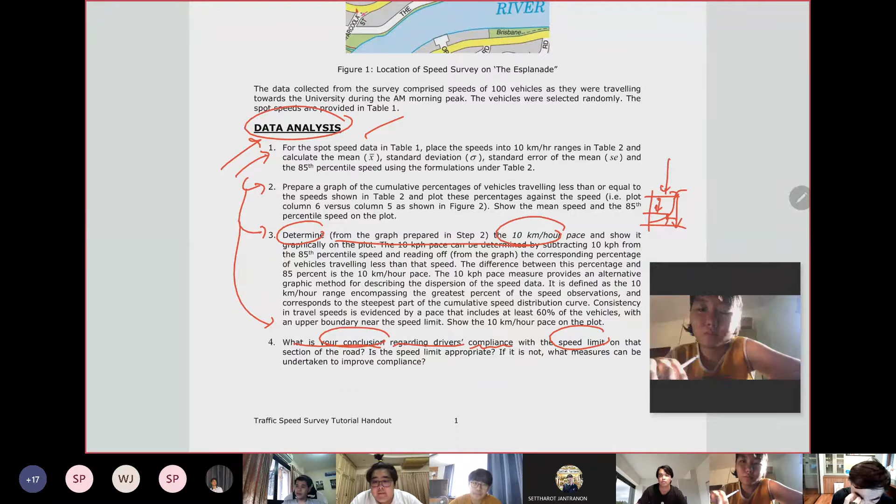Okay, this is all those questions. If you read this file, you're supposed to answer from this one. For those who are not making any conclusion here, please submit.

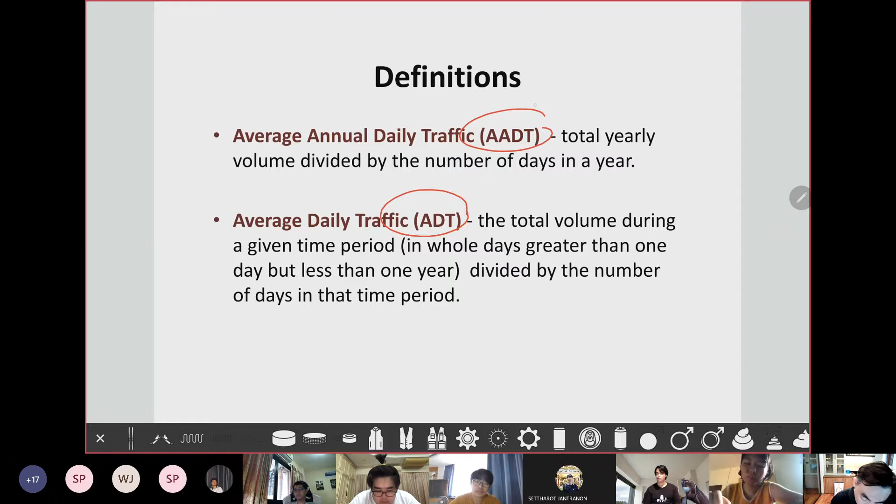These two parameters are very important: AADT and ADT. The unit is vehicle per day, including both directions. You learned what demand and capacity mean, and that one lane's capacity is supposed to be maximum 2,000 passenger cars per hour.

Okay, today we're going to learn what passenger car means, PC, rather than what we used to say, vehicles per hour. Now we're going to say passenger car per hour. What does passenger car mean? We'll talk about that later today.

Okay, this one is related to the location that does not represent the demand. If you go on the road and count the traffic volume, the volume you get may not represent the demand. These two situations could be representative of data that does not represent the demand. Okay, this is the explanation.

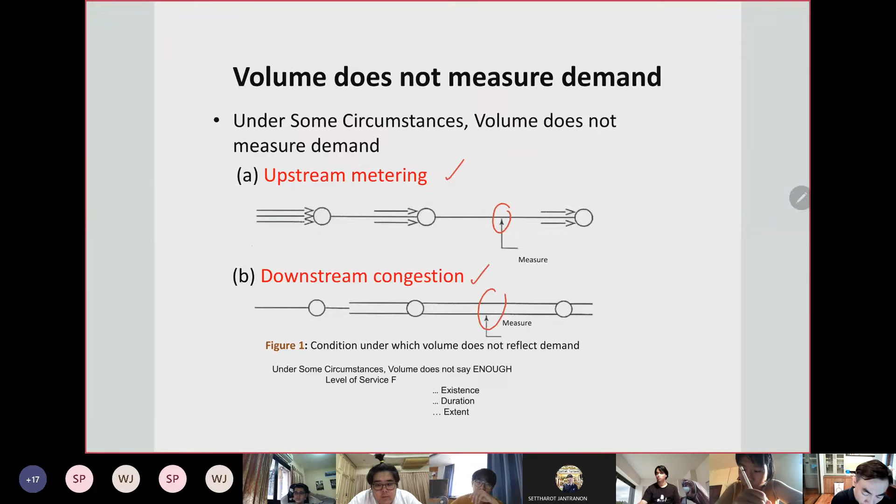For those where demand is over capacity, what can happen? Okay, it will generate queues. The length of the queue gets longer. Okay, and this is the capacity that the facility, road, toll plaza, or whatever can handle, a reasonable number.

Okay, we talked about this one already, and we also talked about how we use this kind of data. Okay, how can we use total annual volume? It's like 10 million vehicles per year. What do we use this number for?

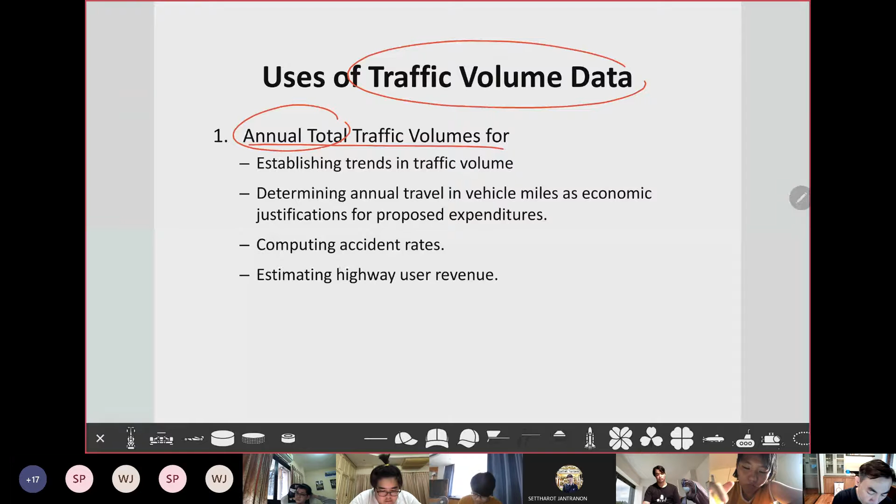Okay, this is the explanation of what we use ADT, vehicle per day, for. We're not going to use this one for designing intersections. We're not going to use this one to design the number of lanes. Okay, we use this volume to represent this kind of information.

Okay, and PHV, peak hour volume, this is the one we use for designing the intersection, traffic light, number of lanes, or something like this. We use this number to handle, we design the facility to handle this volume during the peak period. If we can handle it during the peak period, of course during off-peak it should be fine.

So in one day we have 24 hours, right? But which one are we going to use as representative for design? What is the peak period? What is the peak hour? Which hour of the day? Can anyone give me an example of which hour of the day we should use as representative for design purposes?

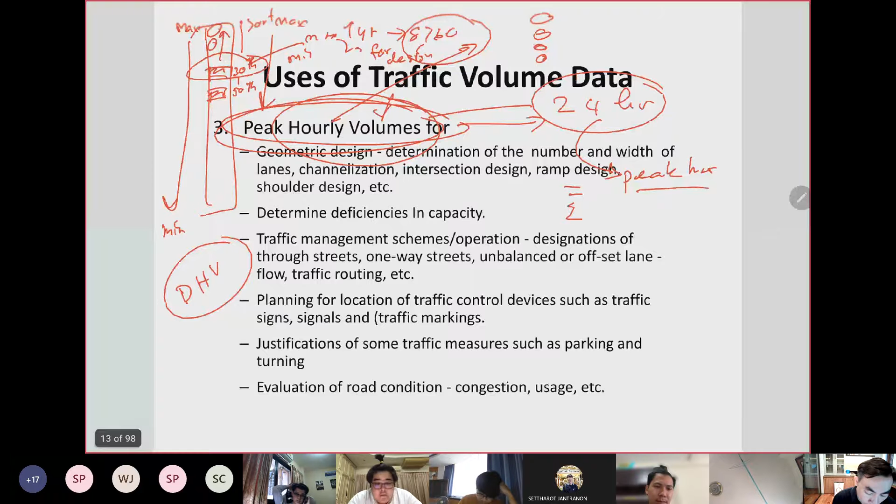We call it design hourly volume, DHV. We call it DHV, okay, design hourly volume. We'll talk about this one later, okay? But just keep in mind that normally we're gonna use this number. Today, we're gonna talk about design hourly volume as well.

We're talking about classifying traffic volume: short-term counts, and we do intersection counts, okay? Intersection count is different from mid-block count, okay? We have another one, mid-block count and intersection count. You should understand the difference between mid-block and intersection count, okay?

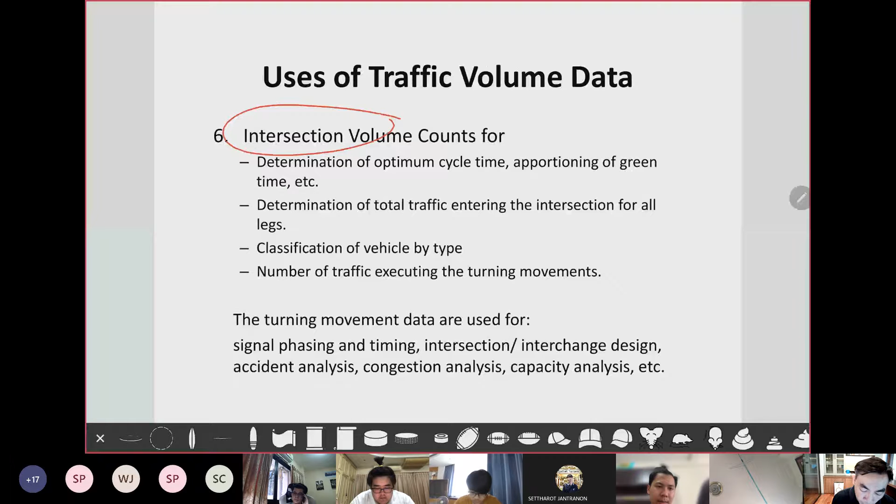Another one is cordon count. Cordon is counting something like a closed area, like Bangkok or Thammasat University. You want to keep a certain count at every entrance and exit. That is cordon count.

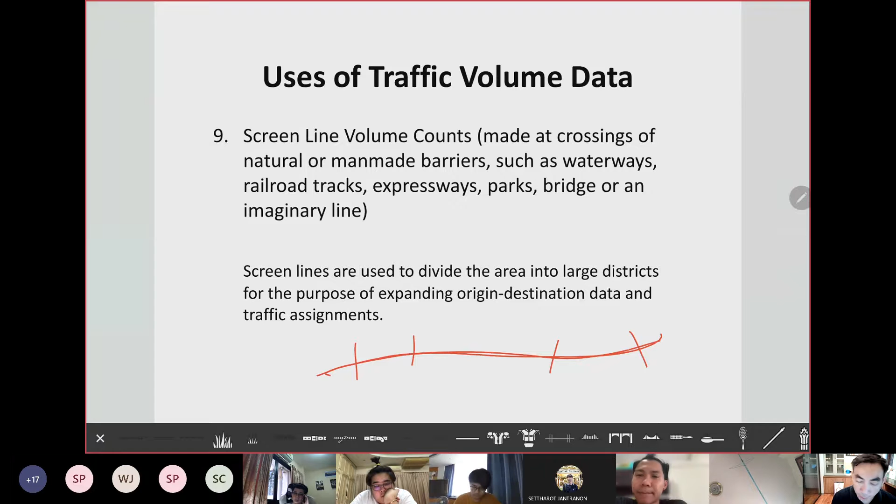And screen line - I gave you the example of the Chao Phraya River counting all the vehicles across the bridge. This river can be considered a screen line counting. It doesn't have to be a natural river or something like this - it can be man-made, like a railway, or even use an imaginary line.

I talked about manual counts. What is the good benefit, okay? What is the good advantage and disadvantage of the manual count?

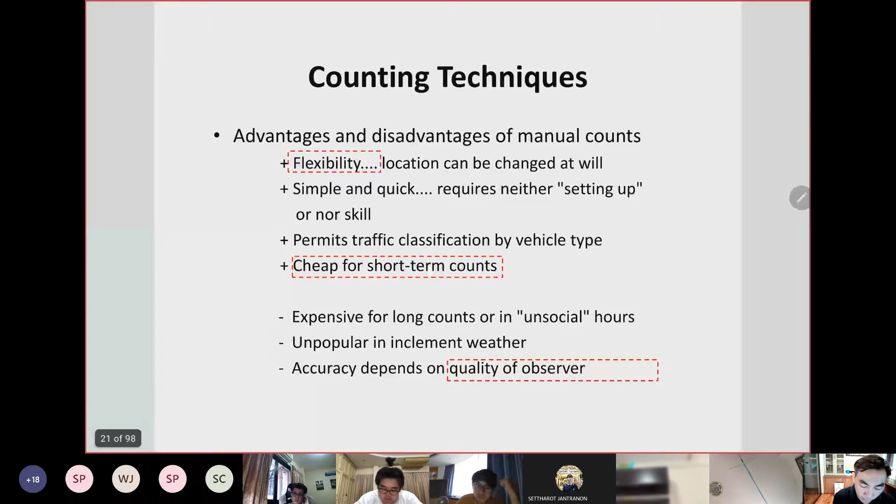And another one is mechanical counting. Okay, this mechanical counting has different technology, okay, other than the loop detector, which is some kind of the oldest one and gives very precise and very good data. The data from a loop detector is quite correct compared to other new technology, but it has pros and cons, okay. This detector technology is considered to be two groups.

The first one is intrusive, okay. The reason we call it intrusive is because it disturbs the pavement, okay - it needs to be cut, something like that, cut the pavement and put something inside to make a magnetic field. That's why we call it intrusive.

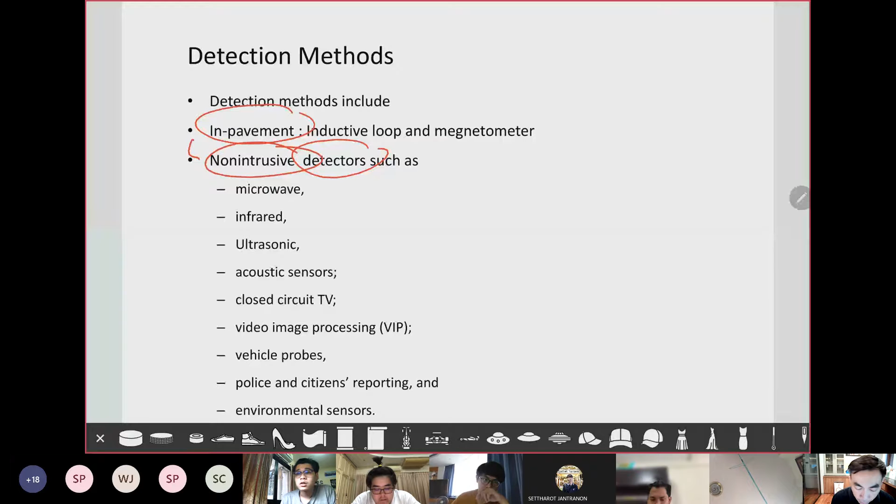Another version is non-intrusive. There are several non-intrusive types. Nowadays, state-of-the-art detectors, most of them are non-intrusive. This can be microwave, infrared, ultrasonics, acoustic, CCTV or something like this. On top is the very inductive loop - okay, just go and read this one.

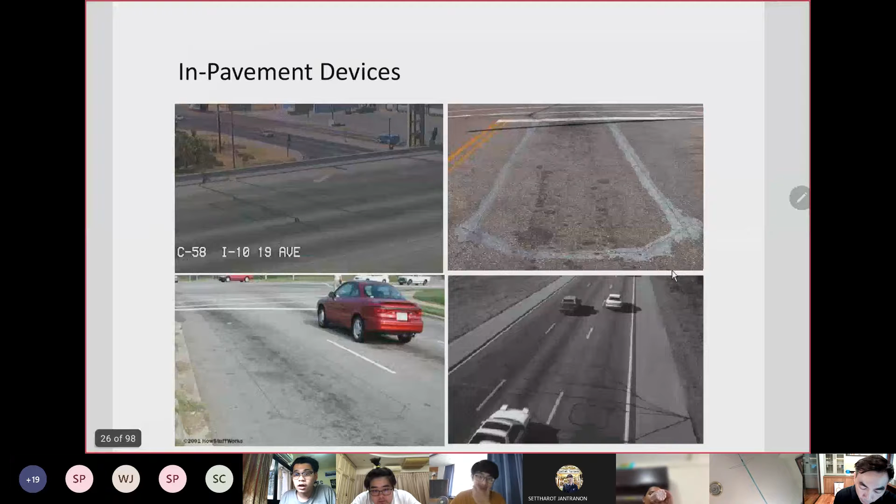This is an example of cutting the road. This is the old-fashioned style in Australia or in the US - they put a lot of traffic detectors along the highway or freeway. This is an example of them installing the traffic detector on the freeway, almost every 500 meters.

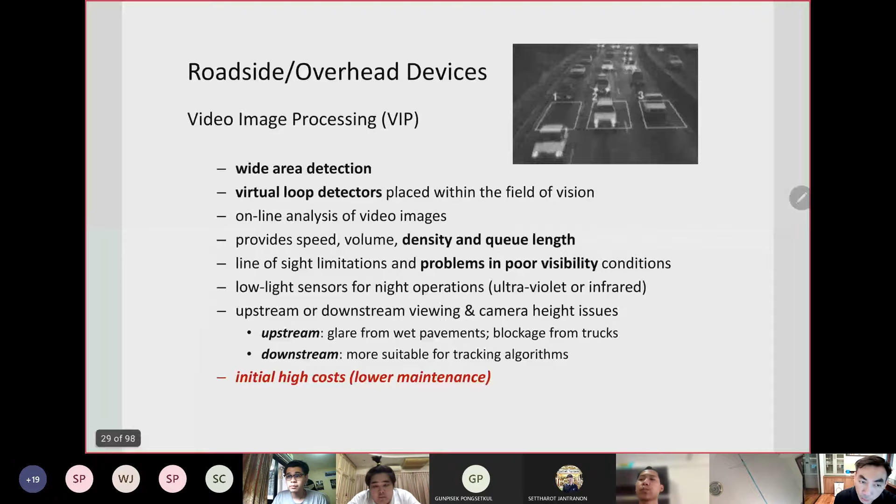And the next one is just to quickly cover what we learned last week, okay - this is video image processing. Okay, they have two different versions. That's why we call it image processing, because they're checking the pixels.

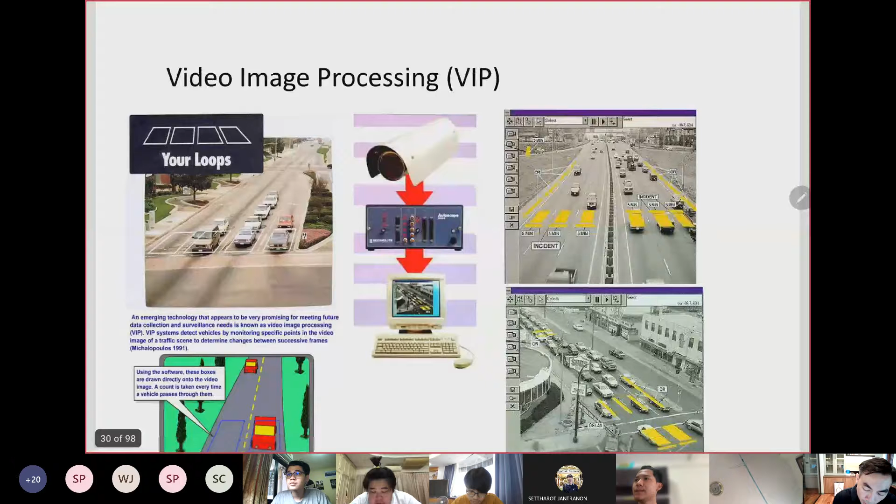To check the pixels of the picture from the area that you can draw on the monitor. Okay, this is the example. We call this a virtual loop. When the vehicle comes to this area, they're counting the changing of the pixels. When the pixel changes, they keep counting - this is the vehicle coming. This is quite good because they can monitor the speed of the vehicle as well, but this is old-fashioned style.

We call this one a tripline. We call this system a tripline VIP system. Yeah, we call this one the tripline VIP system. This is what we call the first generation.

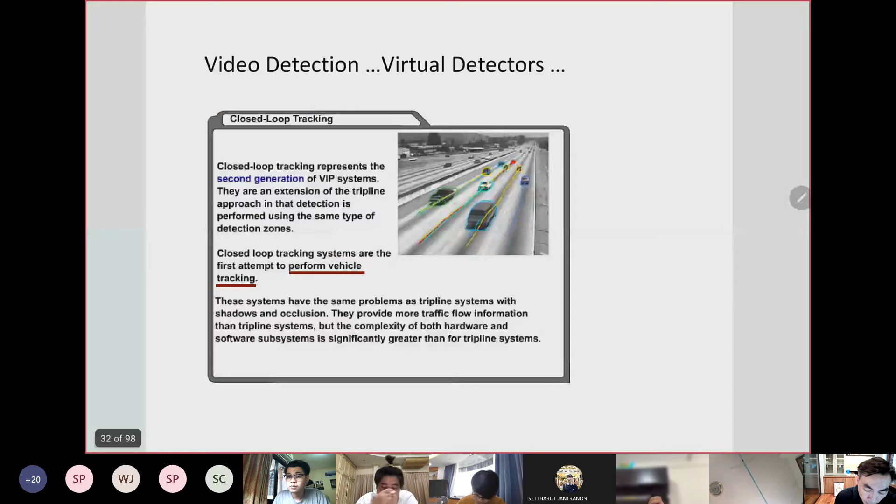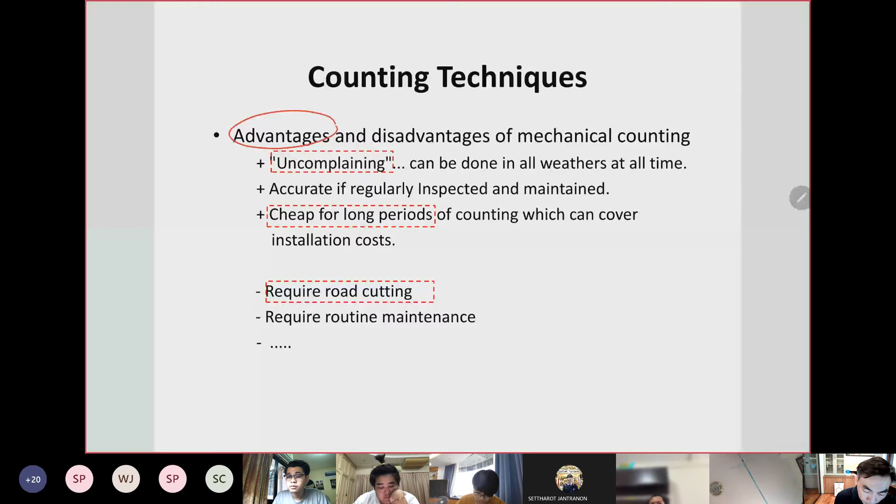And the next one is closed loop tracking. You should be able to describe the difference between closed loop tracking and the tripline system - the pros and cons, the mechanical advantages and disadvantages. That's what we learned last week, up until the speed study.

We talked about the speed study, and now today we have the radar gun. We can count with it. Thammasat University also has a radar gun with Ajahn. We have a good radar gun, and Kasetsart University also has a good one. Okay, we can study the traffic.

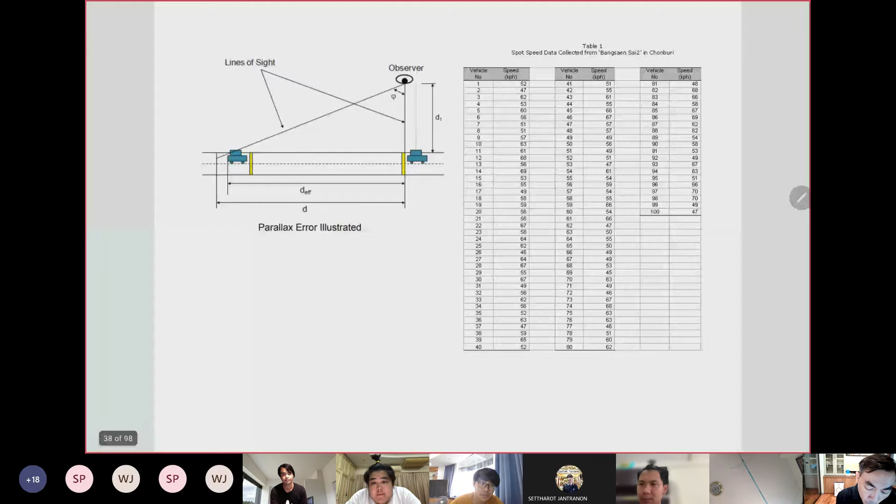Normally, why do we have to study the traffic? We want to know how people feel about the geometry, the number of lanes, the width of the road - how fast they want to drive when there's no vehicle in front of them. Like when there's no vehicles and the posted speed is 90 kilometers per hour, but this is the law. The people may feel this is quite a big road, I want to drive maybe faster than the speed limit. That's why we want to know.

And we can solve this later as an engineer. What should we do with them? Make them follow the law. The goal is to get speed under the speed limit.

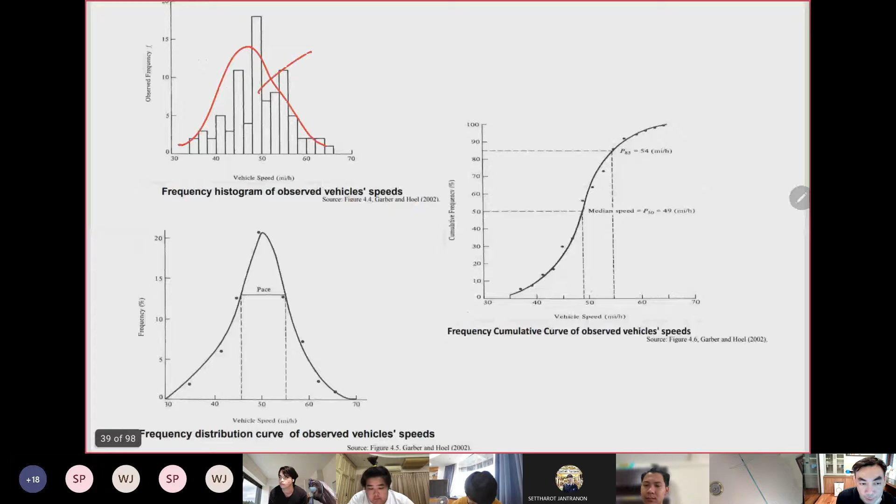What I'm talking about is distribution. We can see the distribution of speed by plotting a graph like this, a histogram. But another good one, cumulative, is what we consider for the speed limit - we plot the percentile. What does percentile mean? You should be able to answer. Maybe I should ask some of you - what does percentile mean? Let me check.

Let's see. Today is the 5th lecture. What does percentile mean, okay?

If you can see from here, if we're sorting the data, it doesn't matter how many vehicles you count. Let's say you count 200 vehicles - you should convert them to be 100%. And then we keep plotting the graph like the homework I gave you, and this graph represents something. Let's say this point is the 85th one.

85th percentile - we draw the line, hit the graph, and go down. Let's say 54 miles per hour. What does this mean? At the 85th percentile, we reach 54 miles per hour. What does it mean?

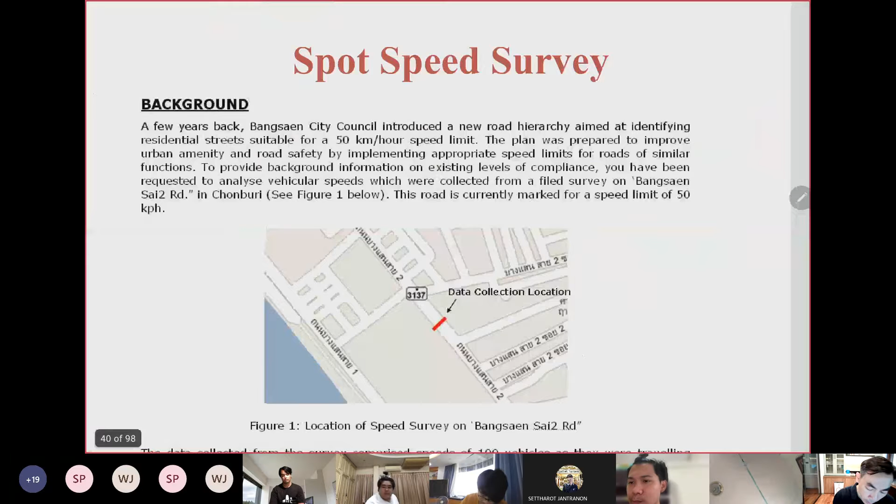Okay, this is the conclusion from last week. Let's give an example. This is the question asking you to do 1, 2, 3, maybe 4. On the exam we have number 4 too. I give you an example hands-on.

Just follow the steps. In this example, they're counting 100 vehicles, and we convert them to be 100%. Plot the cumulative curve. To make the cumulative, you need to do the percent and less than.

This is an example. You should go back and study this one. We talked about the basics of traffic flow. You should know this because we're going to learn the level of service today, and we should know the basics and fundamentals of traffic flow. We talked about some parameters. We have 5 parameters from last week.

Macro and micro: we have 3 parameters that represent the macro traffic stream. That's why we call it macro - it's a combination of a lot of traffic on the traffic flow, on the traffic stream. We call the other two parameters micro because they're not related to many vehicles along the traffic stream, only leading vehicles and following vehicles. That's why we call it micro. We have 5 parameters total.

Anyone could tell me what the first 3 macro parameters are? Anyone? Just raise your hand please.

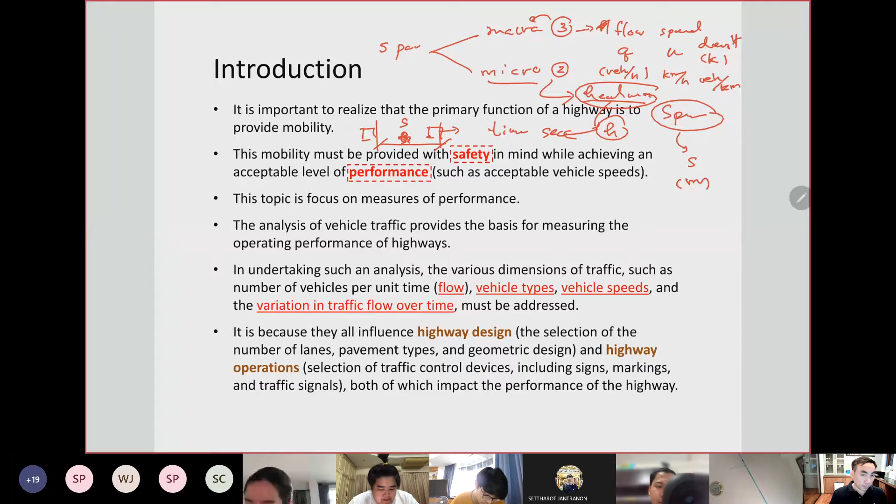Okay, quite laggy a little bit.

Okay, we have two kinds of traffic stream. The first one we call uninterrupted flow, and the second one we call interrupted flow.

Uninterrupted flow is a kind of traffic flow that along the highway doesn't have traffic control to stop the vehicles. When the vehicles slow down, it's just because of other parameters. This is an example of freeway, motorway. Normally, on low traffic, the motorway is not supposed to be congested at all, because there's no traffic light, no stop sign, no yield sign.

But it could happen in certain areas that are bottlenecks. We have the ramp merging in, when the traffic joins together, making vehicles slow down because this area has high density. High density can make vehicles slow down, and traffic jams could happen even on uninterrupted flow. The flow we call interrupted flow, even with no vehicles there, you're facing the traffic light, the red light asking you to stop. This kind of flow we call interrupted flow.

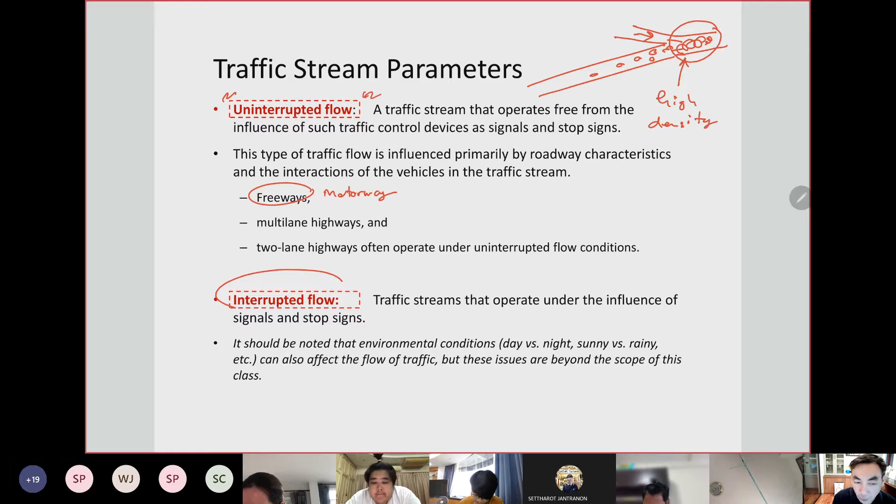Okay, we have two kinds of flow, and we learned about the flow here. I'm not going to talk about this one. Flow, we already talked about speed. We talk about density - don't forget density means vehicles per kilometer.

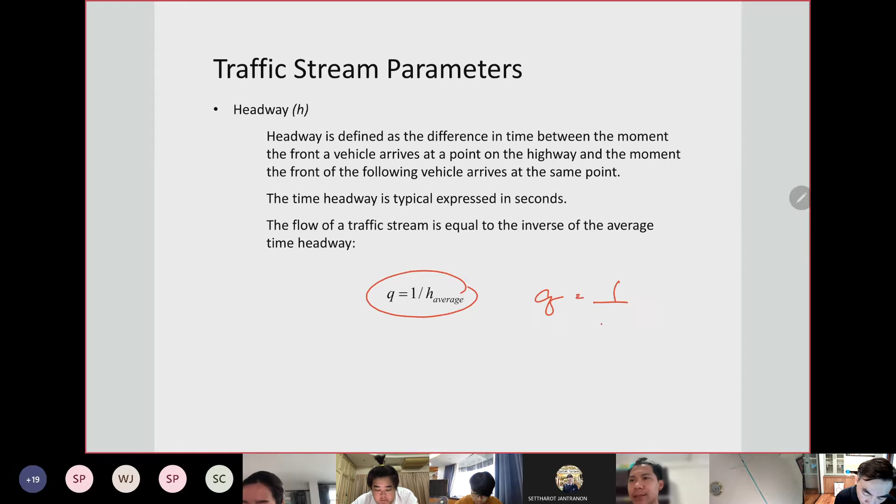Okay, I spent almost 40 minutes talking about what we have learned. Also, the headway can represent the flow. Q equals 1 divided by average headway. And we have the density - density equals 1 divided by average spacing.

Okay, this is the proving of this one. I'm going to talk about this one. Speed - the space mean speed and time mean speed. We talked about this last week, and we gave you the example. Okay, and this one we talked about already.

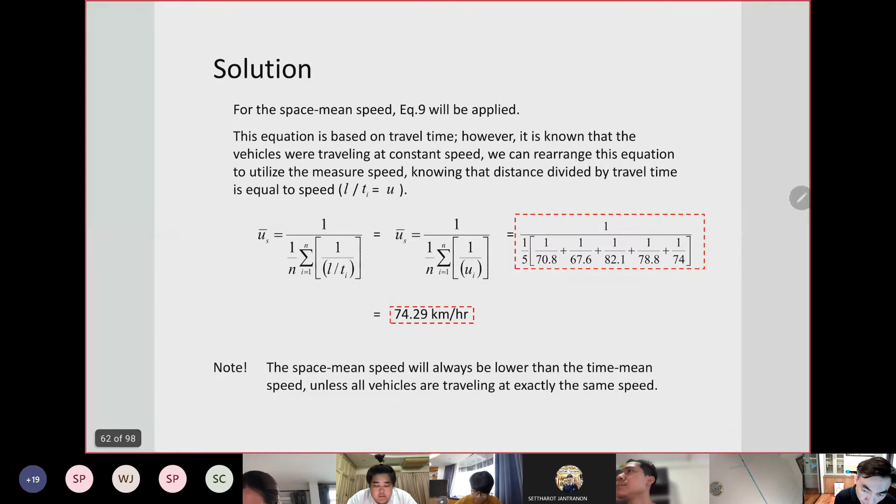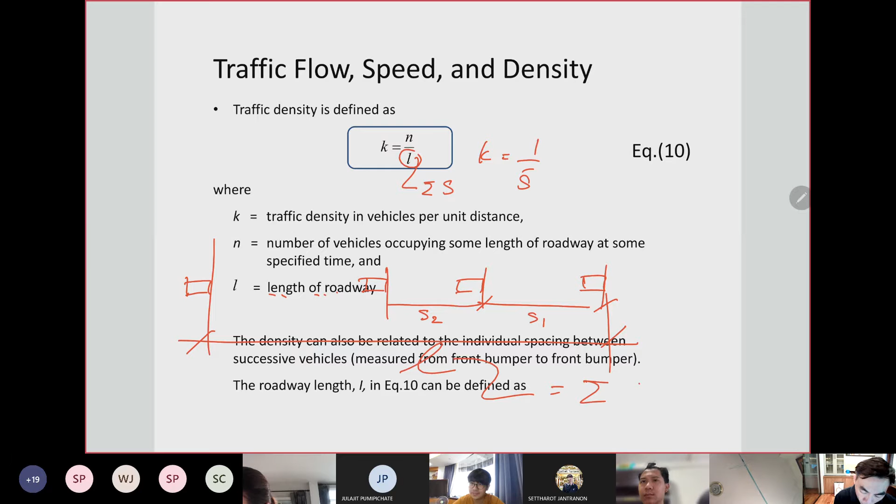When you move N vehicles, go to here. That's why density equals 1 divided by average spacing bar.

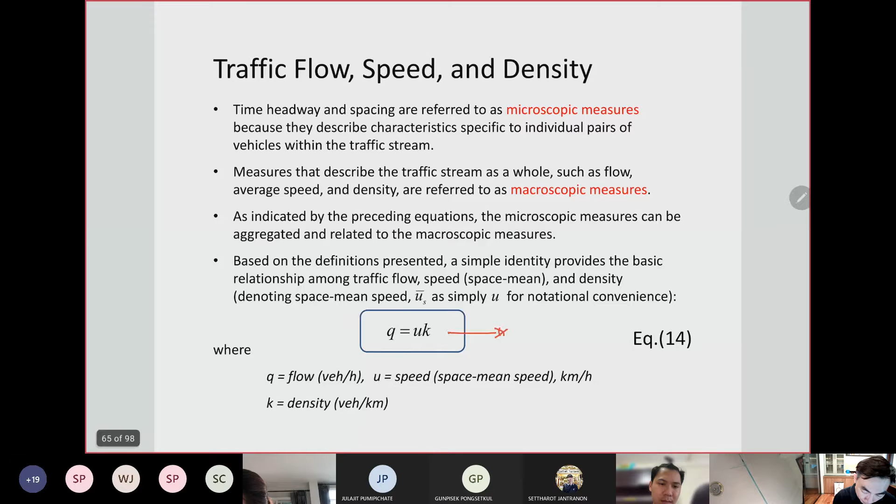The next one, remember this one: Q equals UK. Flow equals speed multiplied by density. And we have this kind of example, from this one already, and this one. Okay, last week I finished here.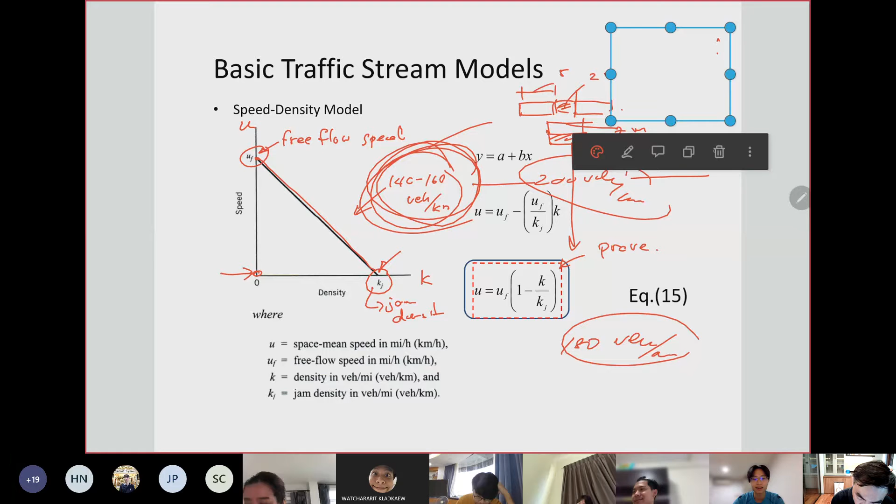Okay, this is a linear relationship. So we can derive from this one to get this one. Okay, U and K.

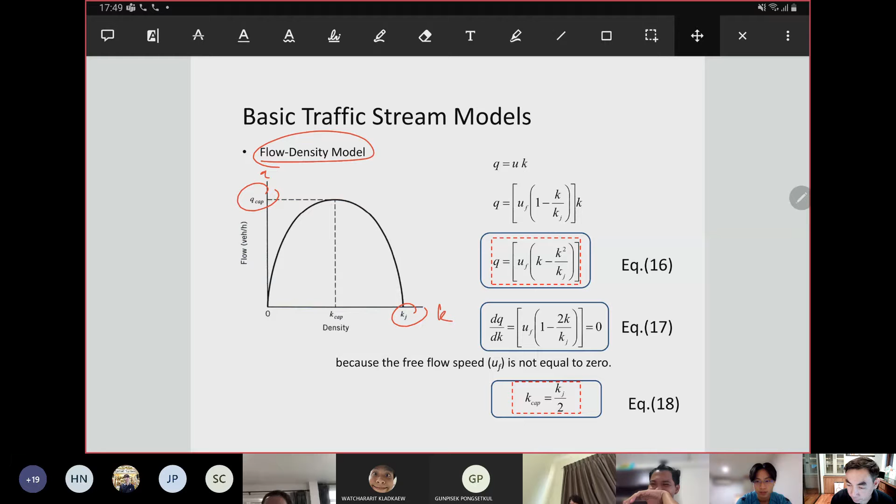The second graph, another important one, is flow and density, Q and K. This is a parabola curve. Okay.

Let's derive the equation from here. Q equals U times K. U, you know, is this one. We multiply by K and we get this equation. This is the relationship between flow and density. We have two density parameters here. And don't forget that U free flow and K jam are constant numbers. Okay, constant values.

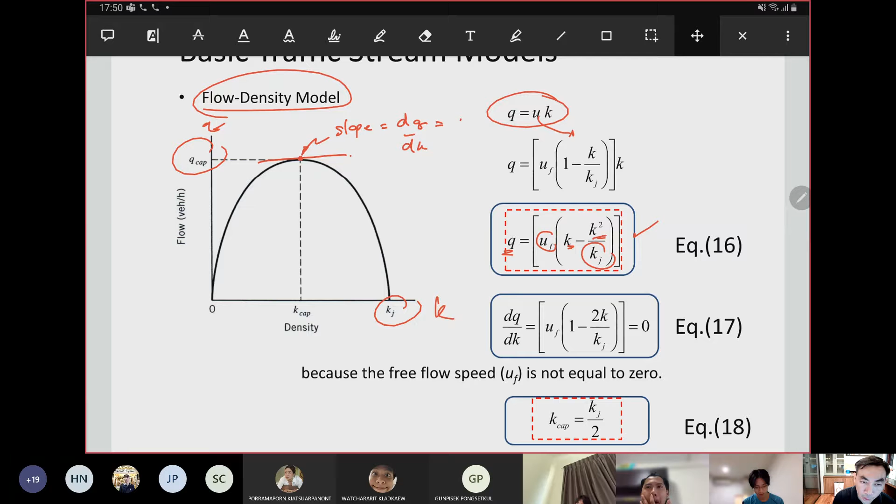So from this graph, it's a parabola. Okay, it has a vertex, the maximum point. At the maximum point, we have the slope equal dQ by dK, right? It must be equal to 0 because it's a parabola. Slope, first derivative, equals the slope of the graph. We set it at the top point, the highest one, the slope must be 0.

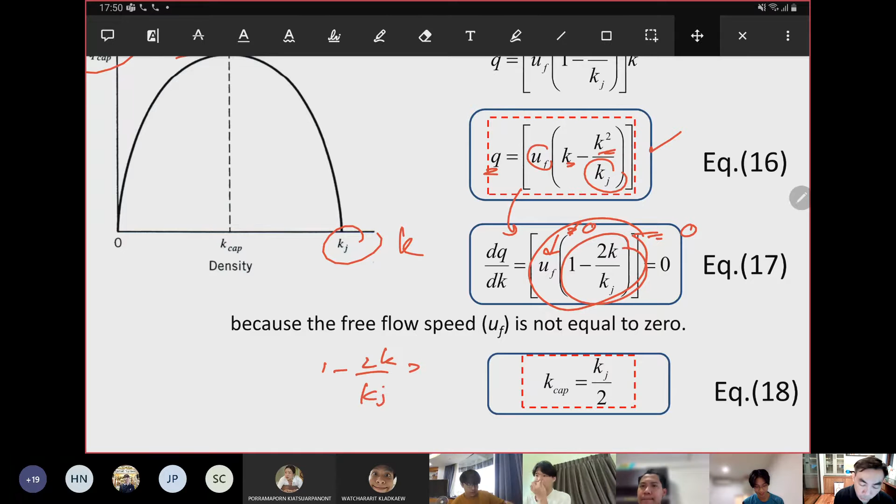Okay, that's why we differentiate and we get this one. So from this one must be equal to 0, but U free flow must not be equal to 0. So 1 minus 2K divided by K jam must be equal to 0. Okay, so the K that makes the maximum flow, this one must be K cap, K cap.

So 2K equals K jam. This K must be K cap, because K cap, this one, makes the maximum flow. Okay. From this one, you move terms, you will get this one: K cap equals K jam divided by 2.

And from this equation, okay, you also can get this one: U capacity equals U free flow divided by 2. So the maximum for Q capacity, or Q max, okay, must be equal to U multiplied by K, right? What kind of speed is this? It must be U capacity multiplied by K cap.

U capacity equals what? U free flow divided by 2. K cap means what? K jam divided by 2. So Q capacity, the maximum flow, equals U free flow multiplied by K jam, divided by 4. Okay, this is Q max. Or we can call it Q capacity. Or we can call it capacity. Okay, we can call it any of these.

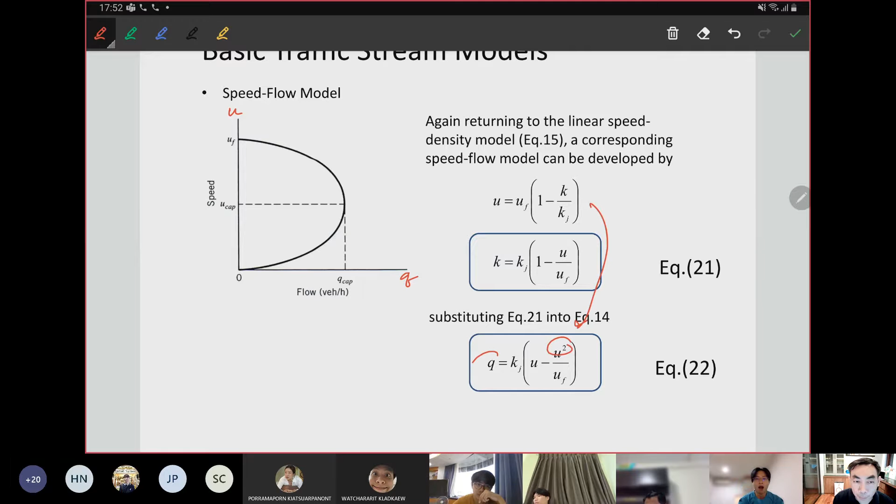Before I come to use this one, I used to ask the students about this curve. Let's see this one, let's see if you can answer or not.

Okay, suppose the maximum flow equals 4,000 vehicles per hour on a certain highway. Its maximum flow is 4,000 vehicles per hour on some highway. If I go and keep counting the flow, okay, the flow means the number of vehicles passing a certain point, and I get Q equals 300 vehicles per hour. Is this a lot of vehicles or just a few vehicles on the traffic stream?

Who wants to answer this question? Quite a tricky one. Comparing to the capacity of 4,000, okay, I go and keep counting, and I can count only 300 vehicles per hour as the flow. Are there a lot of vehicles on the road, or just a few vehicles? Who wants to answer this one? Maybe there's no right or wrong answer.

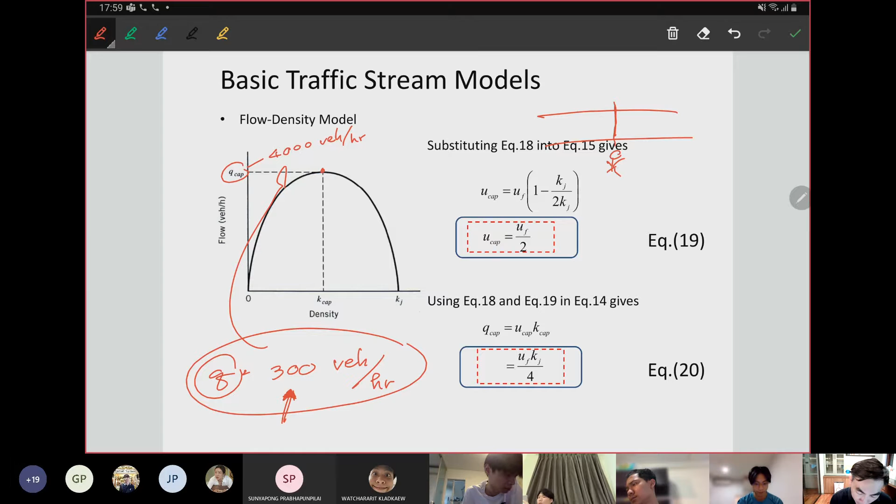If you have a close look here, this is a parabolic curve. If you go here, 300 vehicles per hour, right, this is the flow. This can be two possible answers: it can be very low traffic, or it could be very high traffic, close to jam density, if traffic moves very slow. That's why you can count only 300 vehicles per hour moving from a certain point along the highway. It can be two answers. So if you only know the number of traffic on the road, you cannot tell if there are a lot of vehicles or just a few vehicles on the highway. You need a second parameter to tell you, a reference parameter, you can use density or speed.

From this curve, you can see that if the density of the highway is very low, it means very low traffic volume. Of course, when it's very low traffic volume, what can happen? It's going to have high speed. We have high speed, only 300 vehicles, from here.

That's why we call this part the one needing a second parameter to tell whether there are a lot of vehicles or a few vehicles. But this part, we call uncongested. If the traffic has density higher than K cap, on this part we call it congested. It means that if you have density higher than K cap, it means congested.

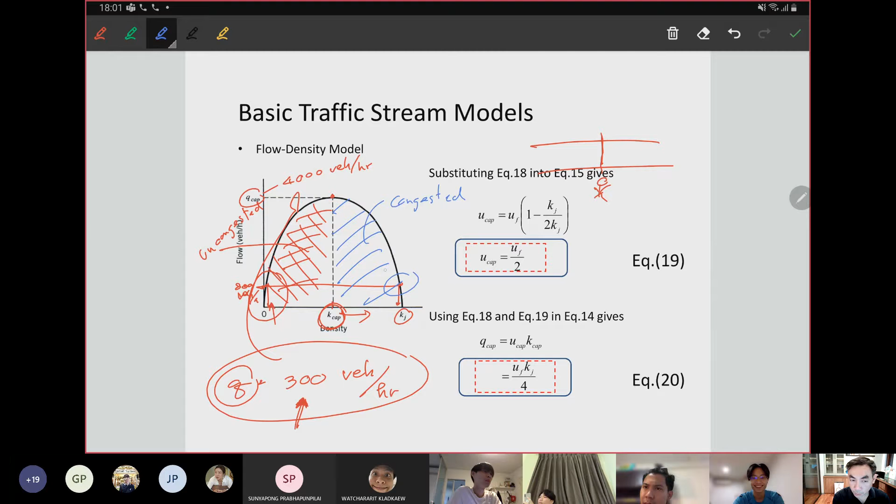Same thing: if you can count 300 vehicles per hour, please tell me the density. If they tell you the density is close to or higher than K cap, it means a lot of traffic jam. Because of the traffic jam, you have really low average speed and really low traffic flow. So we cannot answer right away. If someone tricky asks you whether there are a lot of vehicles or just a few vehicles on the freeway, we need to ask for the second parameter to confirm which part it's on, uncongested or congested.

Here, we have the speed as well, U capacity here. That kind of speed will generate the maximum flow, Qmax. Where's U capacity? Here as well, U capacity. We get the K cap, we get the maximum flow. That's why we call it here.

If we go back and look at this curve first, you can see U capacity and K cap. It means this point, you will get the maximum flow. Or you can see it on the speed-flow curve: if you get the U capacity, you will get the maximum flow. This is Qmax. Come back to the curve.

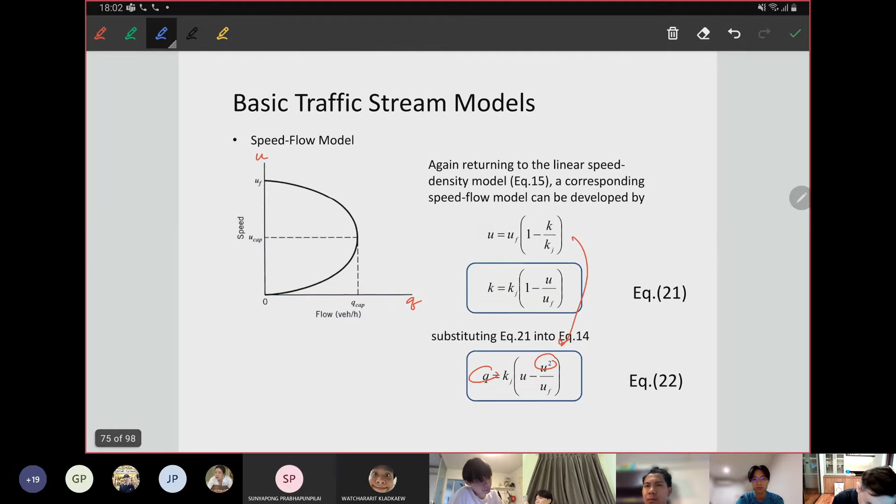Same thing, if you have 300 vehicles, it can be two options. The first on top, this one we also call uncongested area, and this is the congested one, top and bottom. We're considering from U capacity. If the speed is higher than U capacity, this means uncongested, which should have fewer vehicles on the traffic stream.

Okay, let's see this one. Oh, almost 1 hour already. I have another lot of pages to go on the level of service. Let's have a look at this one, it used to be an exam question.

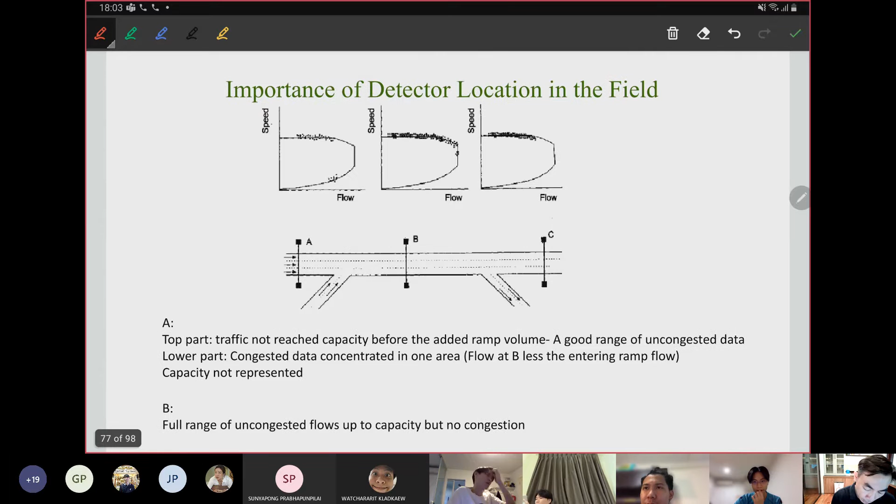I put the detector on 3 locations, A, B, and C. If we are going to plot the speed-flow curve, what kind of graph or data are we supposed to get from these 3 locations? You should understand why the graph or the data on the graph is going to look like this.

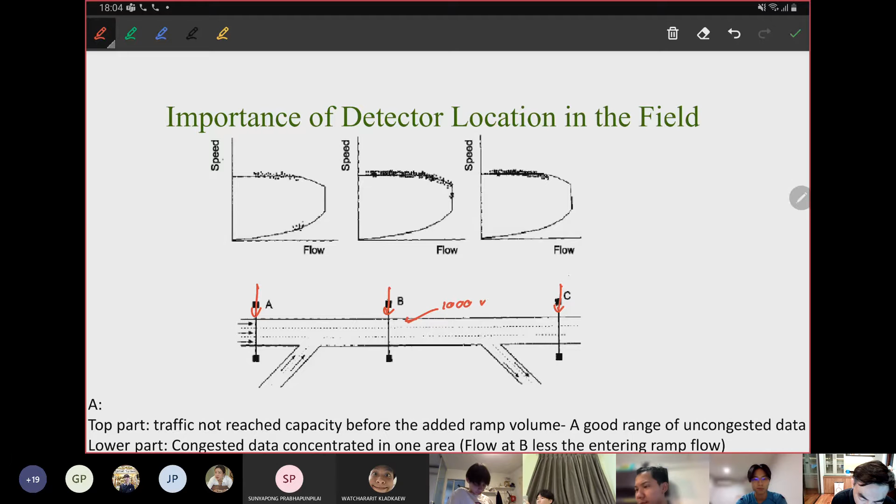Let's say one lane, the capacity assumed to be 1,000 vehicles per hour. So the capacity on this highway equals 3,000 vehicles per hour.

How many vehicles can pass this area? When there's less vehicles, the speed here is really high. As we put more vehicles, the speed keeps changing like this. When we put the maximum until the maximum flow, because the vehicle can come here up to 3,000 vehicles, suppose this one has 2,000 vehicles and this one has 1,000 vehicles, it can be 3,000 vehicles here. That's why it can reach the maximum flow here, 3,000.

At location C, some vehicle must go out, that's why we have the exit here. The vehicles come to this C location. It can hardly reach this point here, because the vehicles must go out, right? So expecting the curve is going to be maximum like this. This is a too easy location to consider.

But the location A is quite tricky, okay? The location A is quite tricky.

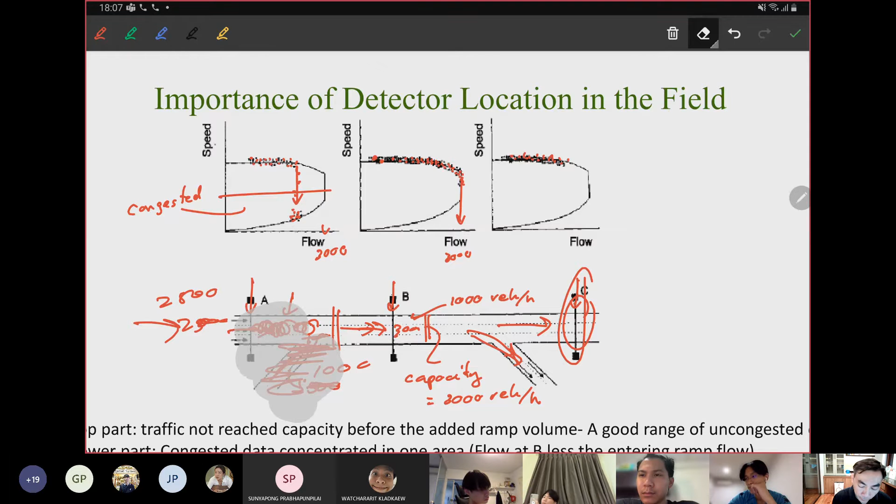This is a deep example. Go back and read this one. We have the explanation here.

Another good example used for the exam as well, okay? This is a certain area of the freeway. We have the bottleneck, let's say the same. If we have 1,000, the capacity is 1,000 vehicles per hour per lane, okay? On the upstream, we have 3,000 vehicles per hour, right? On the bottleneck, it has only capacity of 2,000 vehicles per hour.

What can happen? Let's say 6 o'clock until 7:30. The traffic demand increases up to the flow equivalent to 2 lanes of capacity. Let's say it keeps increasing from 0 until 2,000, okay, because one lane has capacity 1,000. Let's say 0 to 2,000. What's going to happen? Okay.

Just have a look: locations A, B, C, and D. Let's see location A. This is the speed-flow curve, this is flow-density, and this is speed and density. Of course, every point, let's say every 100 or every 5 or 10 minutes, it keeps increasing. The flow keeps increasing up until 2,000.

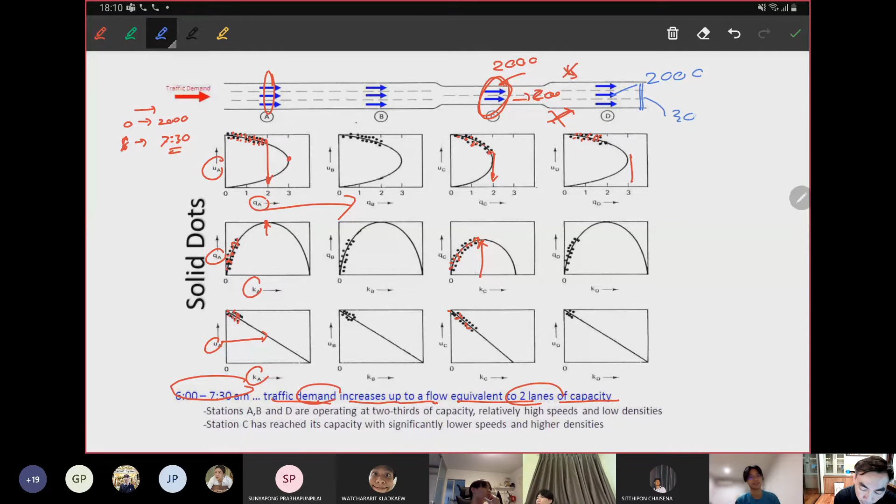How come? Where do the vehicles come from? No entrance, no entrance. So the maximum in this area is going to be only 2,000, but the capacity is 3,000. That's why the graph looks like this.

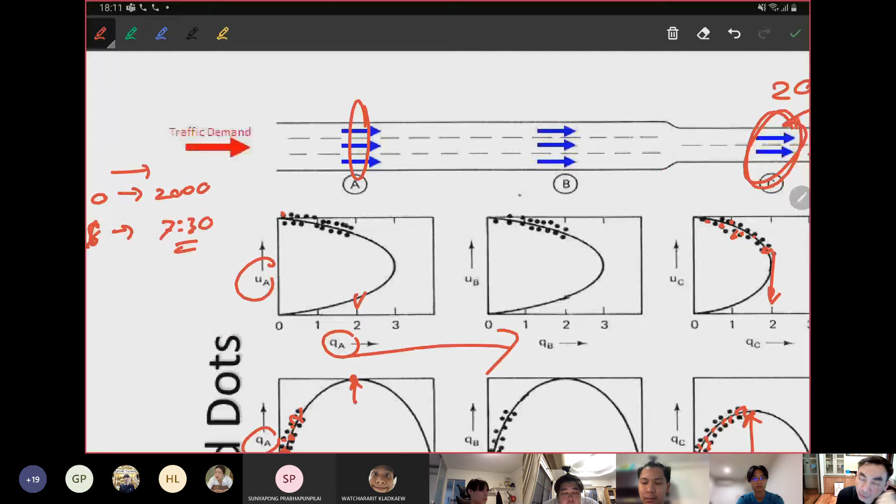The point on the graph—let's say this one, the point along the freeway, okay? Every 5 minutes I will keep pointing one point. I check the flow. Let's say every 5 minutes I keep checking the flow and I point the flow. The flow keeps increasing, right? Every 5 minutes I just keep pointing, 5 minutes.

5 minutes and we check the flow. We keep, let's say, 5 minutes, right? And you keep counting traffic volume. If you get 100 vehicles per 5 minutes, how many is the flow? How much for the flow? Q equals what?

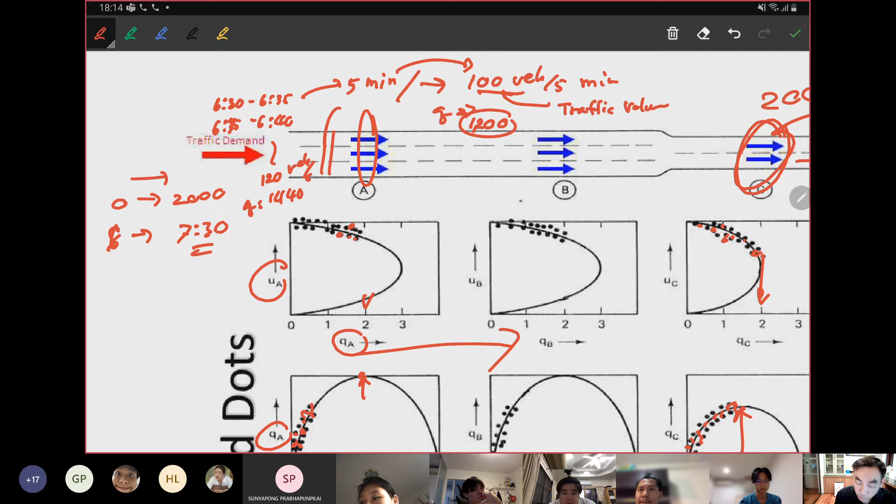So at the end, what time at the end? 7:30. What is the flow? 2,000. 2,000.

You keep counting. During the last 5 minutes, you get 166 vehicles per 5 minutes. You will get the 2,000 vehicles per hour. Okay, this is the flow. Okay, you keep plotting like this.

So the answer of your question is here. Each point is keep checking every 5 minutes. You keep counting, and you get the flow. You understand? Aluna?

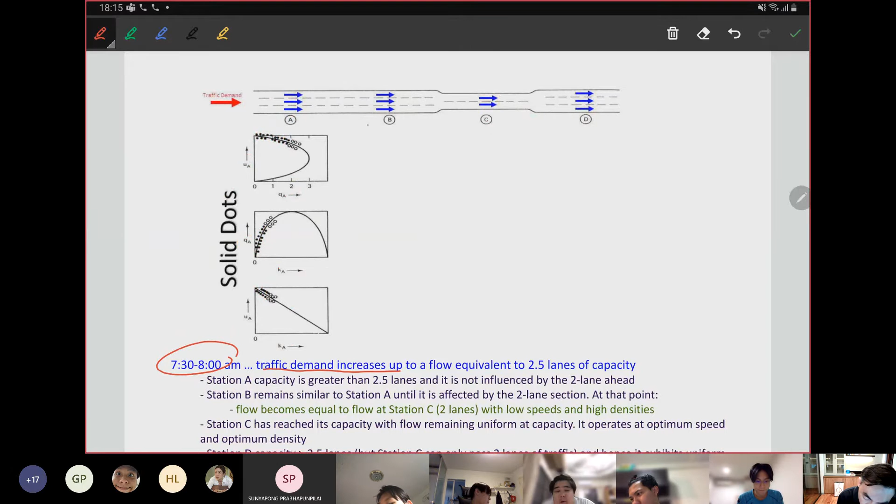And the interesting thing is the next one, the 7:30 to 8 o'clock, the traffic still keeps coming, okay, but the traffic demand increasing up to the flow equivalent at 2.5, lane capacity we reach 2,500 vehicles per hour, okay. During between, it keeps increasing from 2,000 vehicles during 7:30 up until 8 o'clock, 8 o'clock we will have 2,500 vehicles per hour.

What's going to happen on the graph? Just go and have a look on this one, okay. The white dot, okay, you note the white dot here, I will point the green one, okay. Let's say another 30 minutes, right, I will point 1 point for every 5 minutes. They keep increasing so the maximum, here you get 2,500 on the location A, 1 point every 5 minutes, they keep counting, traffic flow increasing.

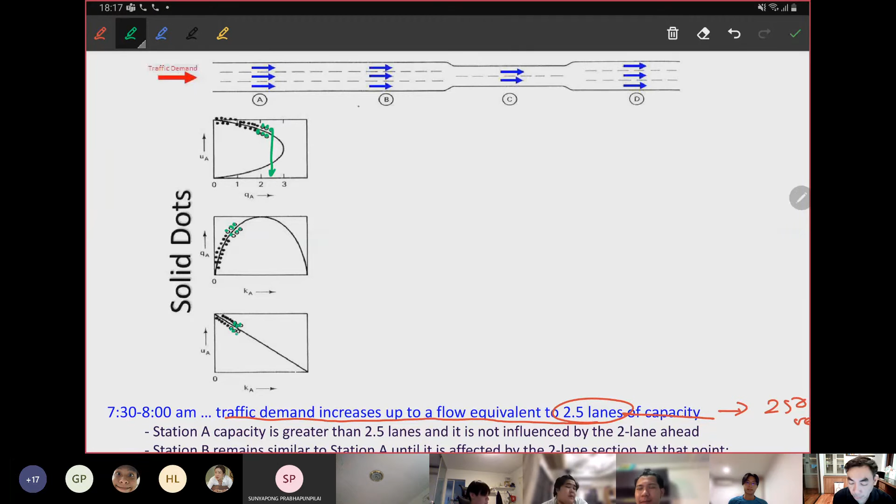Flow increase, density increase, density increase, the speed decrease, here same fashion as B. Let's have a look at the location, not B sorry, how about at location C, 1 point means 5 minutes, right? How many vehicles can come to C location? The traffic keeps increasing from 2,000 up until 2,500.

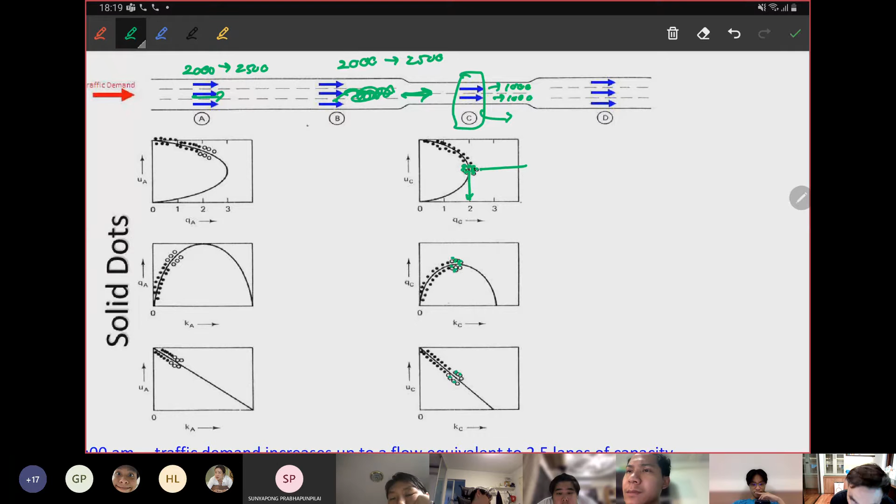Every point still here, okay, this is during the capacity on the road. What happened to D? Of course the capacity becomes 3,000, but you will never get the data at the maximum capacity because upstream you have only maximum 2,000 coming, okay, but downstream here you have the 3,000 capacity. You never get the 2,500 vehicle come here because the maximum is 2,000, here the graph is always coming like this one.

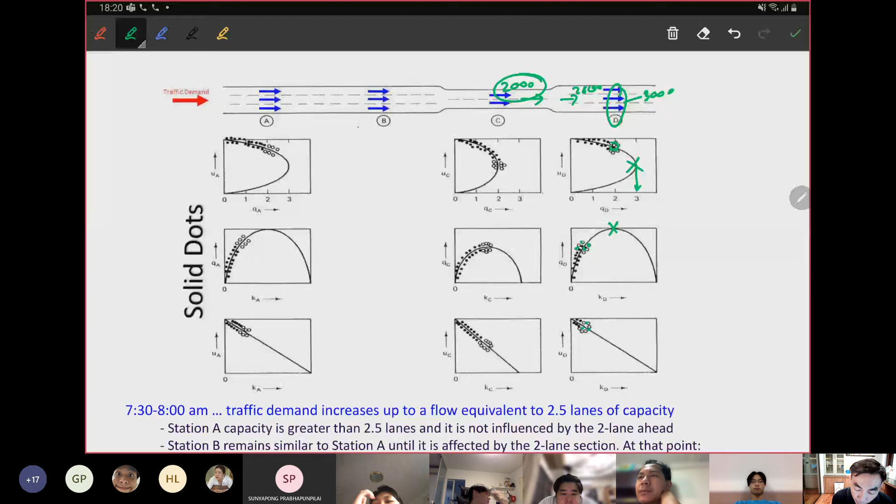Okay, this three location is quite easy to understand. Okay, go back for those who not understand yet. Okay, go back and read again. We have the explanation here.

Okay, but the problem is on the location B. The B is quite interesting. Okay, let's try, this capacity is 3,000. Okay, 3,000, the capacity here, 3,000. Here, this location, 2,000.

But the traffic demand is coming here, 2,500. What's going to happen? Only 2,000 can go. Another 500 still waiting to go, right? It's generating the high density on this area. Because we have waiting 500 vehicles on this area, it's increasing higher density. That's why its maximum is 2,500, but still cannot go further than this one.

The data keeps going down, it has higher density, you can see the density here, okay. The density comes to the lower part, high density, it's low speed. When it's low speed, it's low flow. The data comes to the congestion part here.

And the speed-flow curve is also dotted here. You will not reach 3,000, maybe you can reach 2,500. But when the data of the density gets higher, it goes down. The speed goes down and flow goes down.

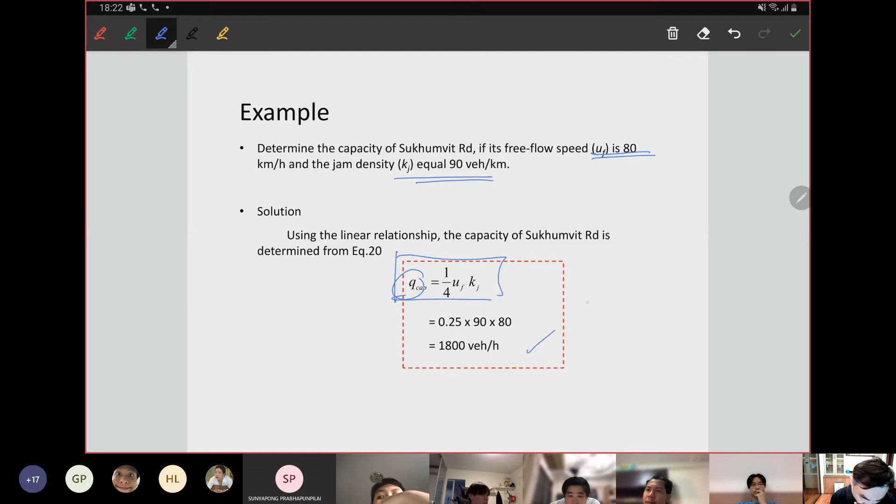1,800, just capture the answer. Okay, the second example: the sections of highway is known to have the free flow speed, U free flow, equal to 90 km per hour, and it has the capacity 3,300 vehicles per hour.

At a certain hour, I'm not sure which hour of the day, but they keep counting the vehicles. They have the traffic flow q equal 2,100 vehicles per hour, counted at a certain point along the highway.

If the linear speed density relationship, what we learned, okay, what would be the estimate of the space mean speed? We want to know the mean speed of this. Okay, what should we do?

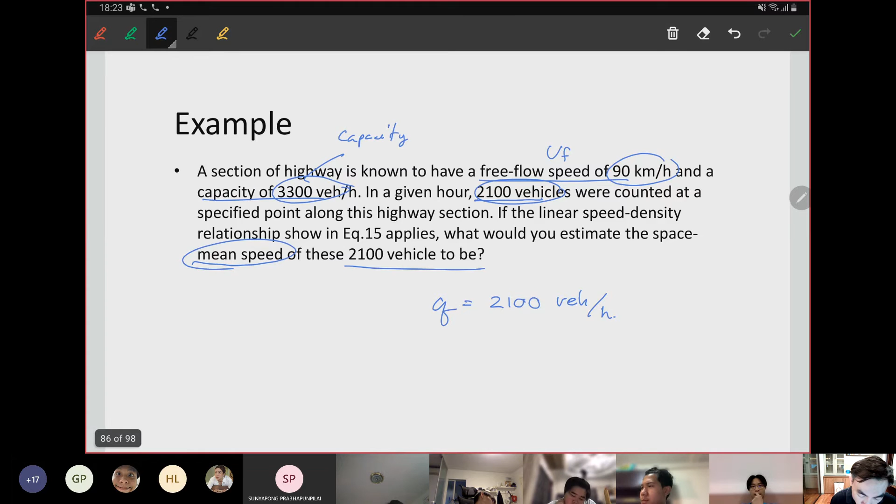Of course, this flow has not reached the capacity yet. Okay, the speed must be lower than free flow speed. The free flow speed equal 90 km per hour.

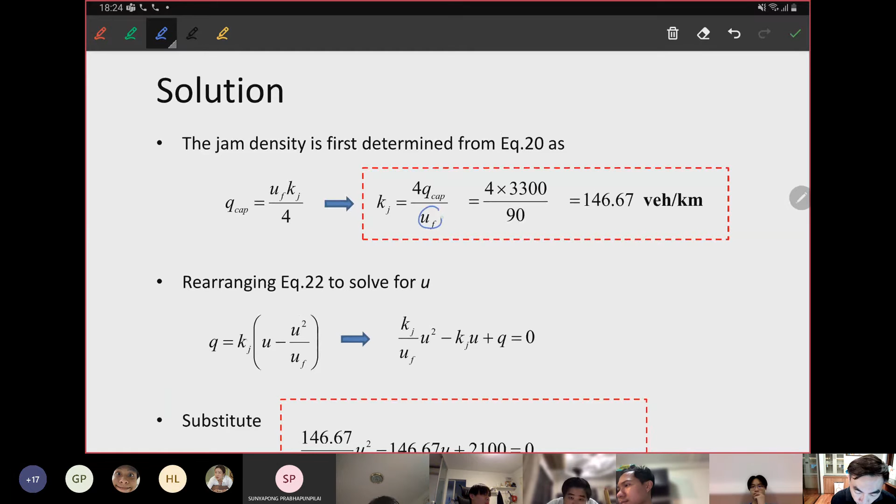First, we can find what the question gave us. We gave the U free flow, right? K equal, move this one. We know kjam. We want... no, we don't know the kjam. We know the capacity, okay, we know U free flow, so we can find the kjam here.

So we know the kjam density equal to 146.6 vehicles per kilometer.

The flow equals 2,100 vehicles per hour. We get the speed. Answer to speed here: 72 and 17.78.

They ask the speed. What is the speed flow curve? The curve looks like this, right? This is the speed and this is the flow, okay. And they ask you that at 2,100, this is the maximum flow, is 3,300.

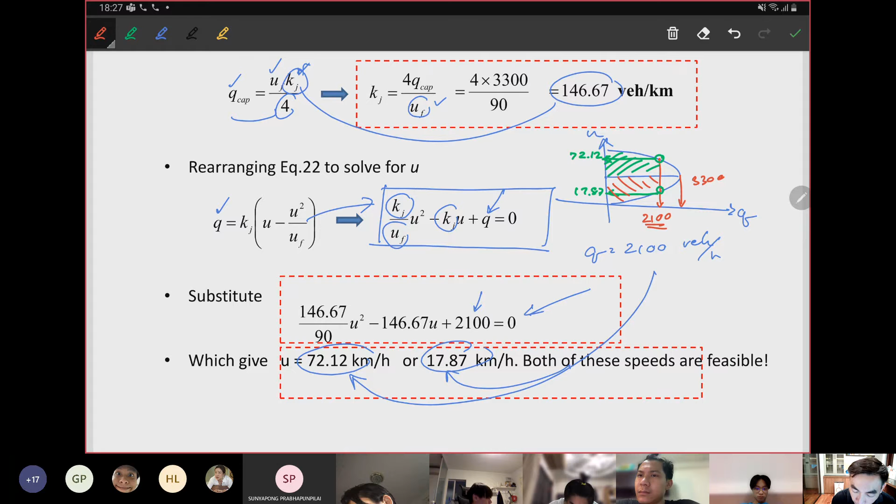If I'm specific on the parameter and tell you that this question has traffic density quite high, it means that the density is higher than the K cap, the answer could be here.

If we want to specify the speed: the density is quite high on the traffic, what is the average speed? After you solve the equation, the answer should be 17.87 kilometers per hour.

But if I'm asking, oh, the traffic is not a lot on the road, the speed is quite high, the average speed quite high, so the answer should be here, 72.12. If no specification, the answer can be both speeds, which get the results of traffic flow equal to 2,100 vehicles per hour.

Okay, any question? If no question, we go to the last one.

Okay, the last one, we just give you an example for mile per hour, another unit, or we use foot represent compared to the meter, okay, this is compared to kilometer per hour. We have some certain points, I will give the point. I have 2 or 3 questions on this one. Okay, preparing for answer.

If you want to give the exact point, even if it's just a few points, believe me, after you get the exam, those 2 points are very important.

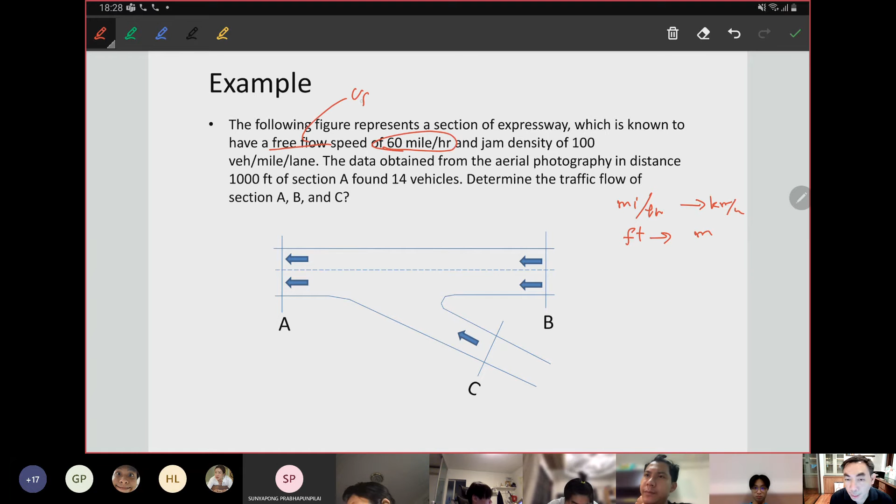The following picture represents a section of expressway, which is known to have a free flow speed equal to 60 miles per hour, U free flow, and jam density equal to K jam, equal to 100 vehicles per mile per lane. Be careful, this is in miles, you cannot use meters.

The data was obtained from an aerial photo, a top view. They used a drone and took a photo from the top view from the air.

On section A, they found 14 vehicles along 1,000 feet. In the same fashion on section B, over 1,000 feet, maybe we're missing some information on the question, but we have 8 vehicles on section B.

Okay, this means they want to know the traffic flow, Q. They want to know the flow here.

My first question: what do we get? What does the question give us? If they give us 1,000 feet and we know there are 14 vehicles on section A, what kind of parameter can we get from this information? Who wants to answer, please raise your hand. Just what parameter can we get from here, 1,000 feet with 14 vehicles on section A? Anyone want to answer?

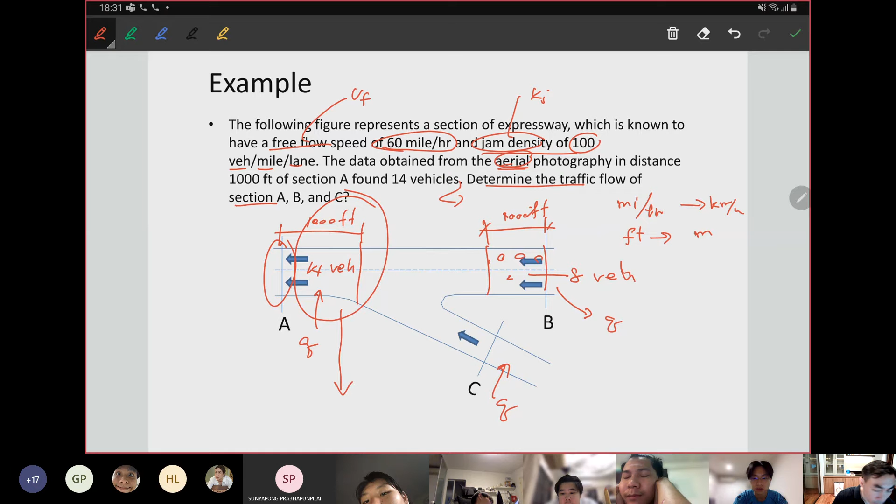It's density — number of vehicles per distance. Okay, we can get the density.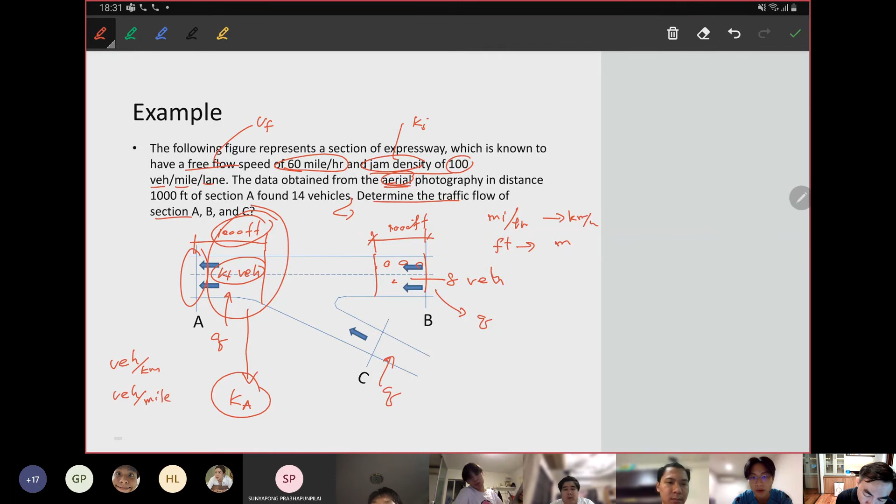Normally density is vehicles per kilometer, right? But here it's vehicles per mile. So here's what we're doing: they gave you 1,000 feet, but we want to know per 1 mile. How many feet per mile? It's 5,280 feet per mile. So with 14 vehicles, what is the density? It's equal to 73.92 vehicles per mile.

This is the density on a 2-lane road. If I want to know the density on this road with 2 lanes, K equals 73.92 vehicles per mile, but we want to know only per 1 lane, we have to divide it by 2. This density combines both 2 lanes, but if we want to know density for only 1 lane, you need to divide by 2. That's why we divide by 2 here.

Okay, density during section A equals 36.96 vehicles per mile per lane. Now for K at B, same thing.

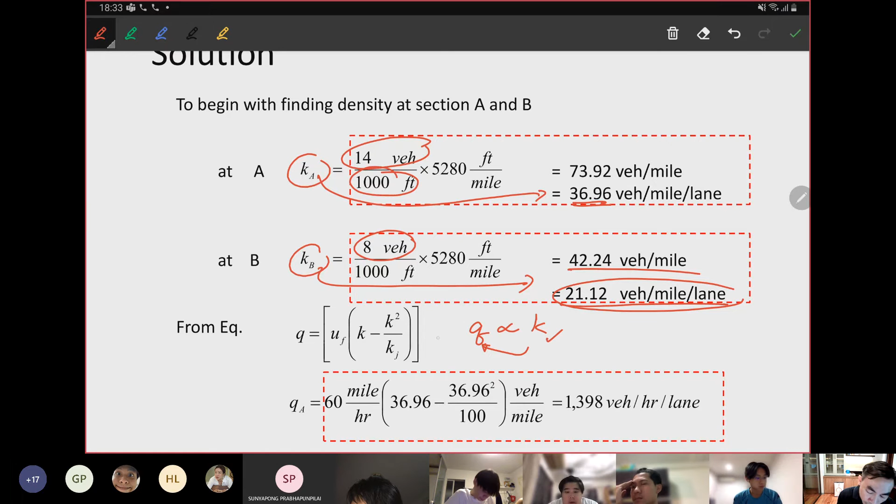So we want to find the flow on section A, QA. QA equals U free flow multiplied by K.

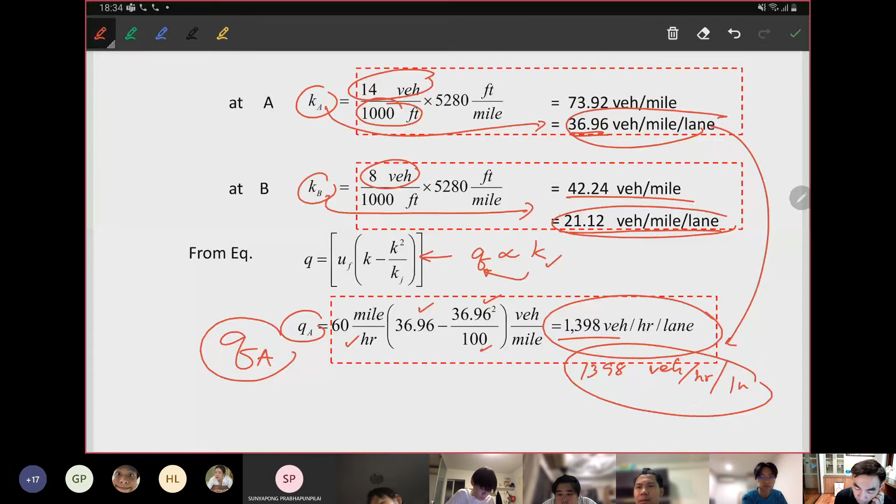You get 1,398 vehicles per hour per lane. Don't forget, you got this from density per lane, so this is the flow per lane. But what is the flow QA from 2 lanes? You need to multiply by 2, right? Don't forget to multiply by 2, because there are 2 lanes.

Anyone want to answer? If the flow at A, how much flow is during section A? What is the flow?

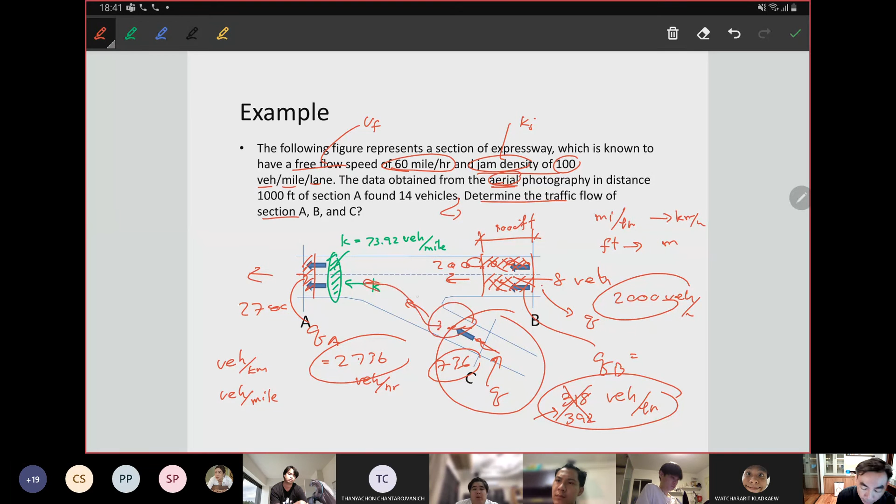Just one more important parameter before we break, just 5 minutes. We talked about this one already: volume versus rate of flow. Let's look at this — we keep counting here, this is a 15-minute counting period. This is traffic volume, right, traffic volume.

Here, they said — what is the flow here? Anyone want to answer what is the flow here during 8 o'clock until 8:15?

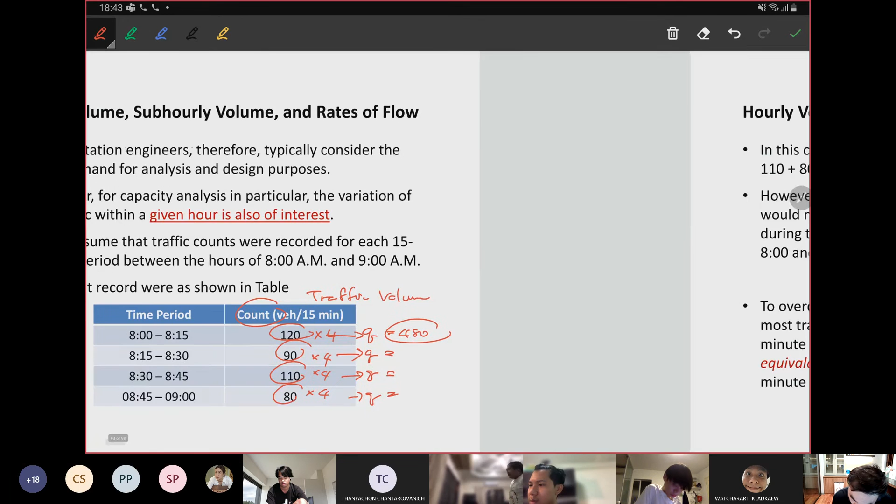So the total per hour is how many vehicles? 400 vehicles per hour. If you keep counting, you have only 400 vehicles per hour, but during 8 o'clock until 8:15 you have a flow of 480 vehicles per hour already.

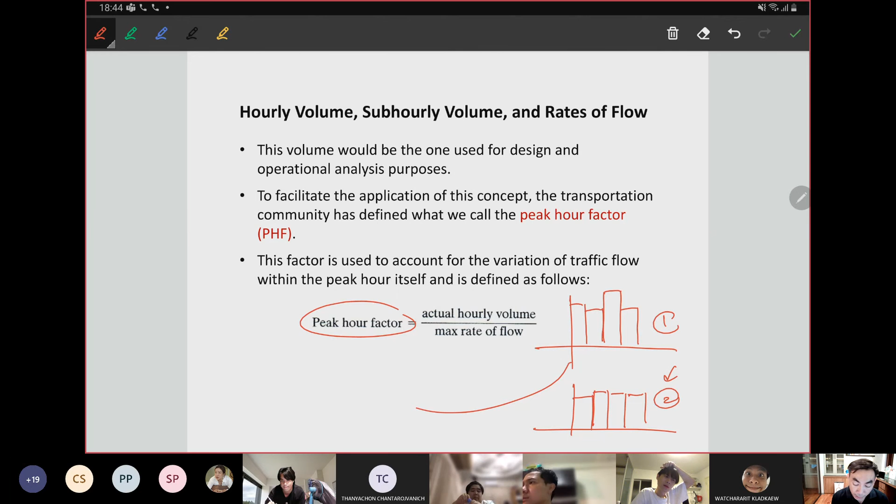We have another name, we call it peak hour factor. The traffic engineer made this definition to explain the fluctuation of traffic flow during the hour - first 15 minutes, second 15 minutes, another 15 minutes. You can see the second hour is quite stable. How can we capture the fluctuation of traffic flow during the hour? We use the peak hour factor to capture the variation of traffic during the hours.

How do we calculate this? You use the actual counting hourly traffic volume divided by maximum rate of flow. You can see the rate of flow for each.

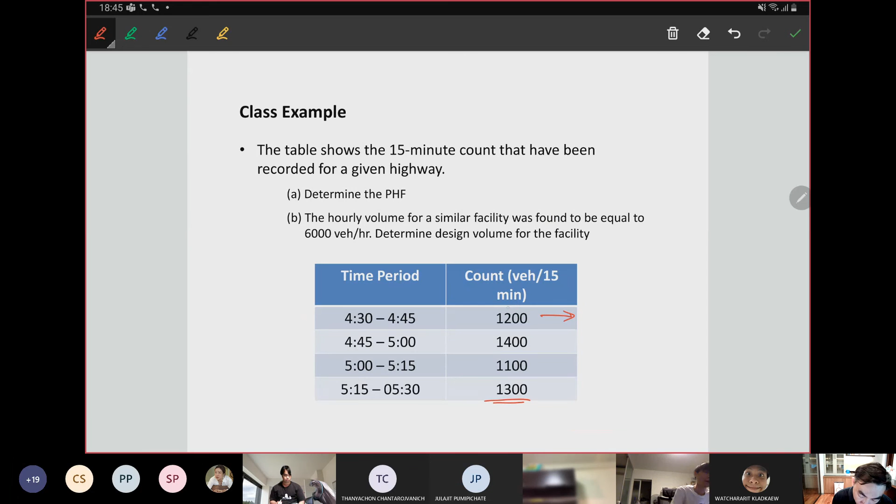Let's give an example here. The total, how many vehicles per hour here, to determine the peak hour factor? How many vehicles per hour can you combine? Is it 5,000? Okay, 5,000. Can you find the rate of flow for each 15 minutes?

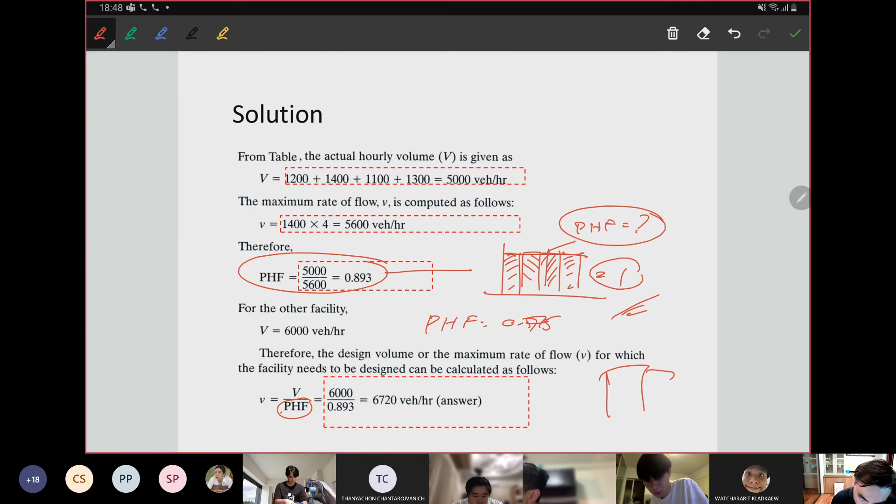Sometimes we know the peak hour factor, we can find the maximum flow rate. This is important when we want to design the road, design the highway - we use this one as a design flow rate. Please remember this.

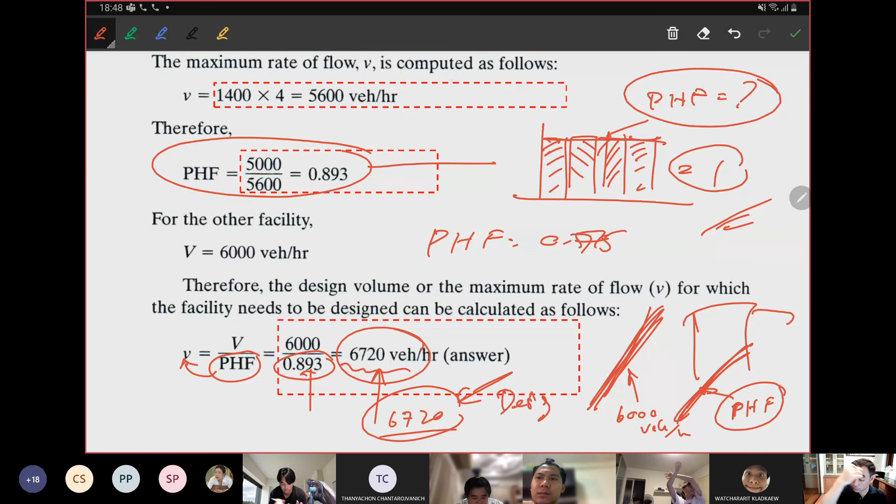Sometimes we want to build a new road, but we have information from some kind of similar freeway. We know the peak hour factor of that road, so we forecast traffic of 6,000 vehicles per hour. We want to see the maximum flow rate, so we borrow the peak hour factor from the other road, divide it by peak hour factor, and we get the maximum flow rate here: 6,720. Maximum flow rate just makes sure traffic is not jammed, same as this one.